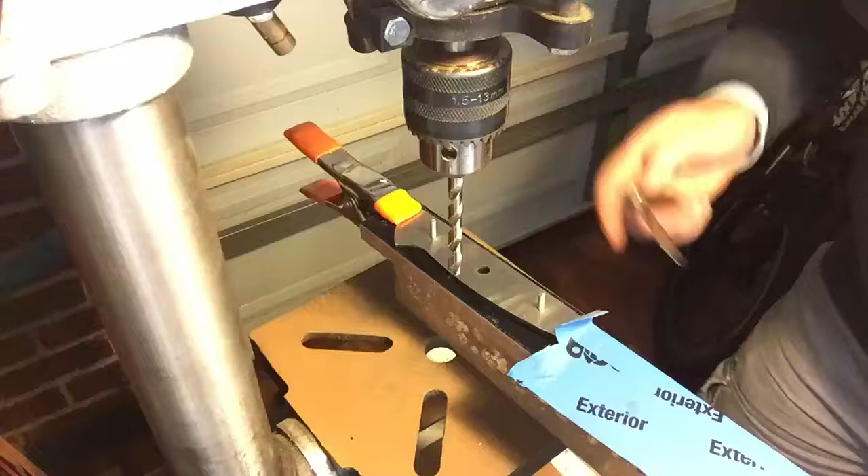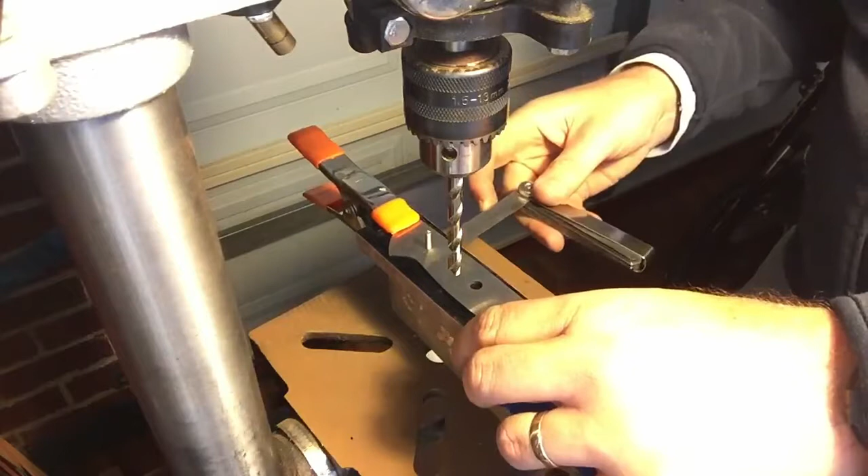So I've just set up my, well, for 1/4 of an inch, the closest oversized drill I can find is 6.5 millimeters, which is a little larger than I'd like. I think 1/4 inch, the hard conversion is 6.35 millimeters, and I'm using a 6.5 millimeter drill. That's a little bit larger than I would like. So if anybody knows of an intermediate drill, please let me know.

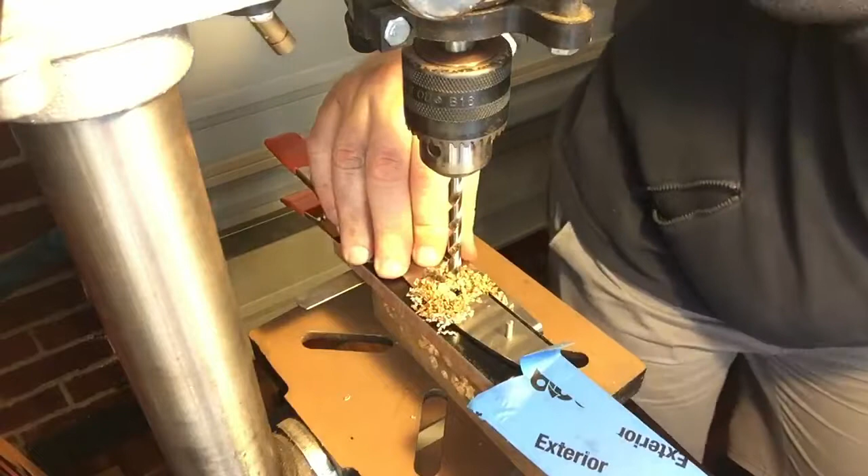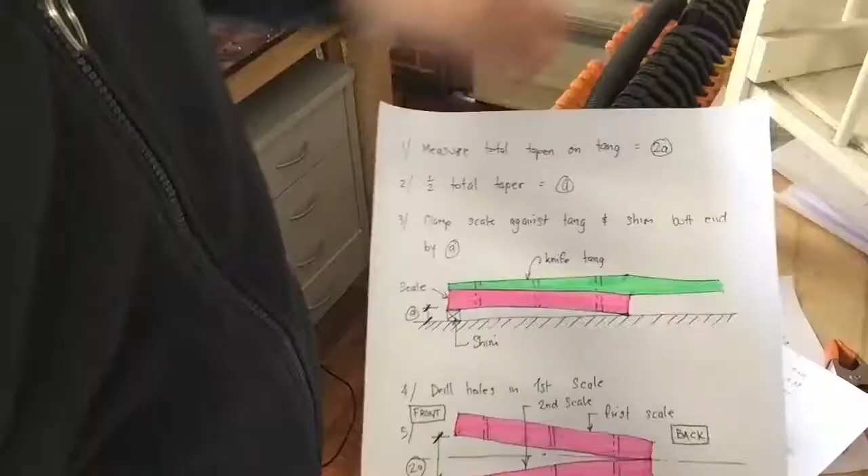Here we go. So I've re-shimmed up the back of the knife, so the knife is parallel or horizontal again. Let's do the 6.5 millimeter drill. And that is the first scale fully drilled. So I've just done a little diagram and some notes here to help us along.

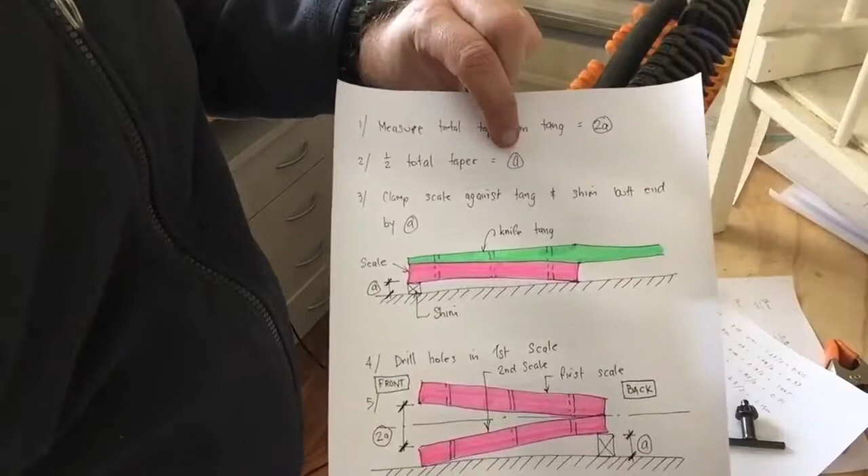So the first thing we did was measure the total taper on the tang, which I'm going to call 2A. And then we divided the total taper by 2 and we received A. In this case that's 1.15 millimeters. So the third thing we did was we clamped the scale against the tang of the knife and we shimmed the butt end by A. So that's the first process we did.

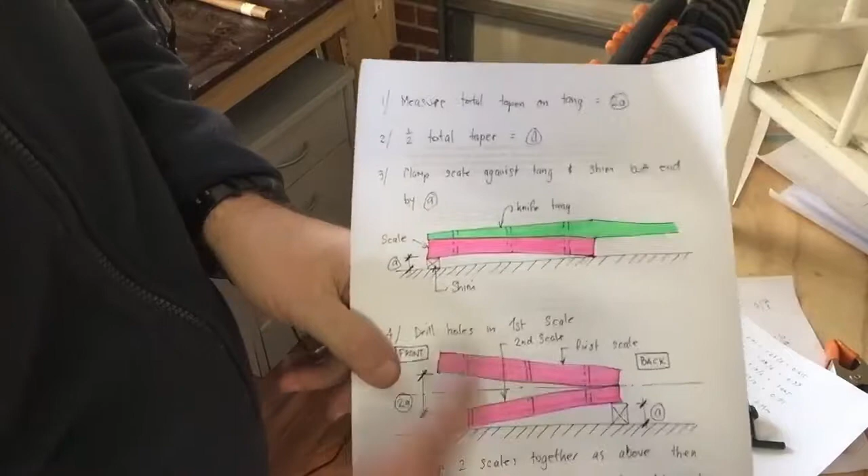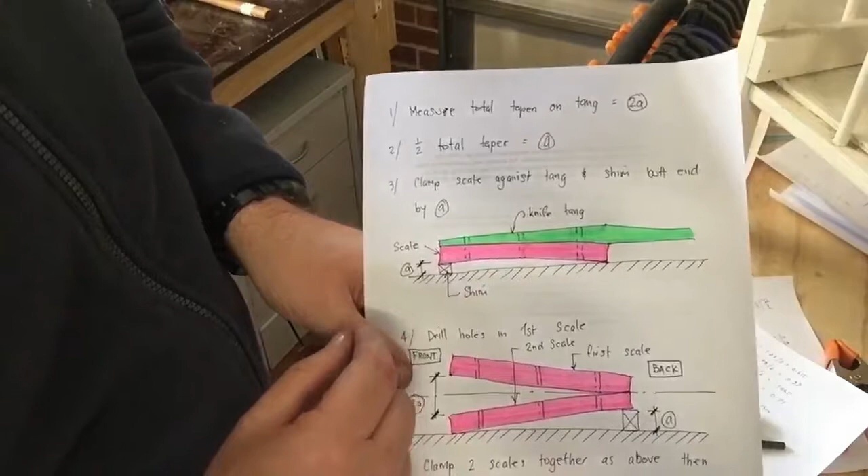The green is the knife with the tapered tang. You can see it tapering down there. The scale is the pink thing. We clamp the scale against the knife, against the tang, and then we put the shim in. The shim was A, which is 1.15 millimeters.

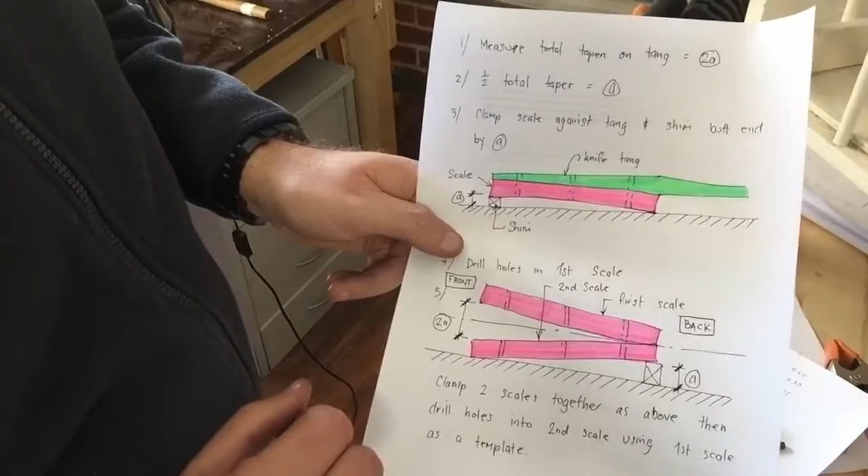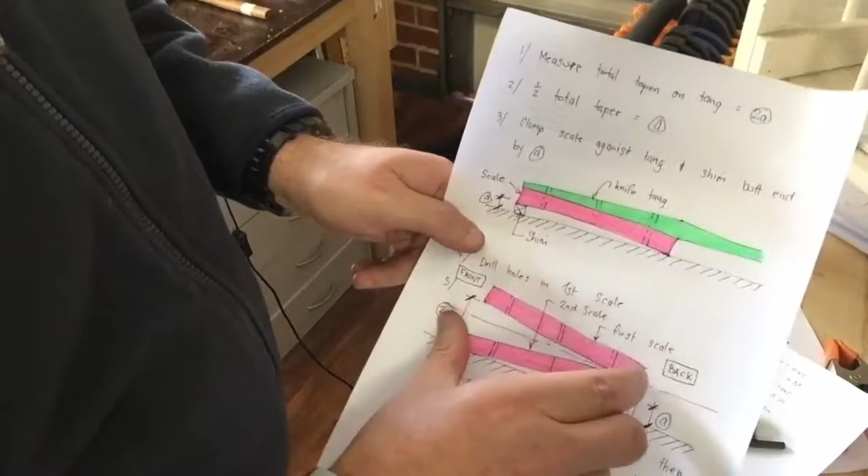So what we're about to do now is we want to drill the second scale, and to do that, now I've drawn this, so this is the back of the knife and this is the front of the knife. Unfortunately here I've shown it around, so here's the back of the knife, the butt, and here's the front of the handle scales near the choil.

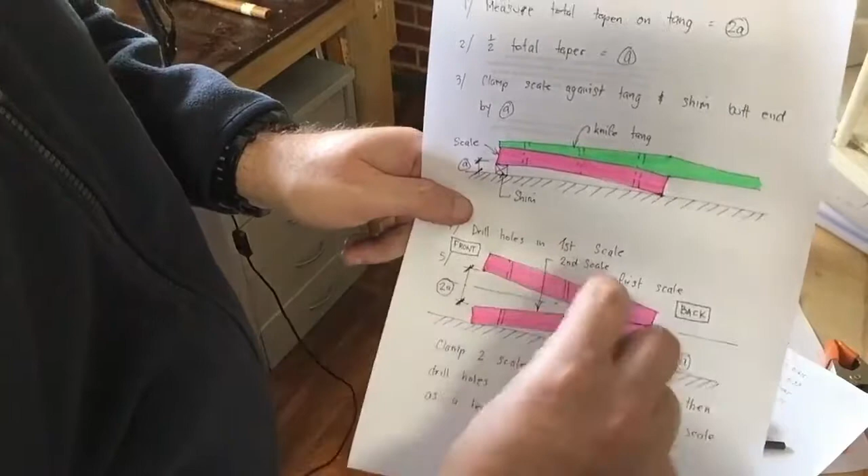So what we're going to do is we're going to take the knife out, we don't need it anymore, and we are going to put a shim in between the front end of the two scales, which is 2A, which is the total taper of the tang. So basically we're trying to replicate the angle of the two scales if they're on the side of the tang. So we put this 2A shim at the front, we leave the back touching, and now it's the same shape as if it was sitting on the knife.

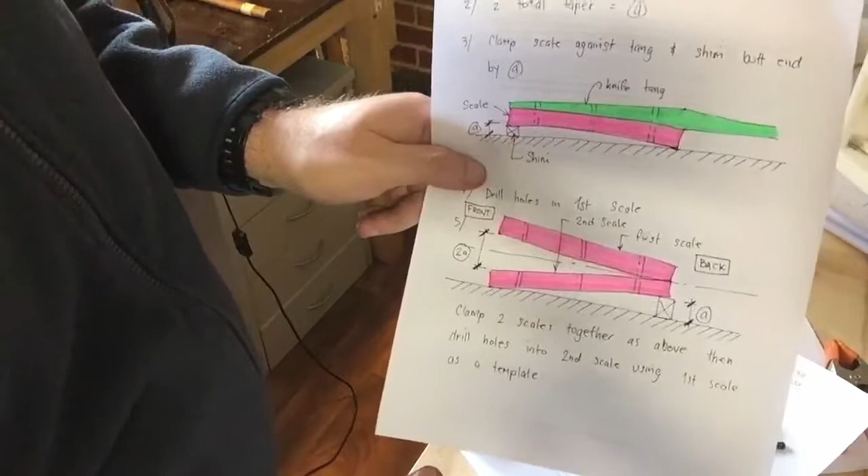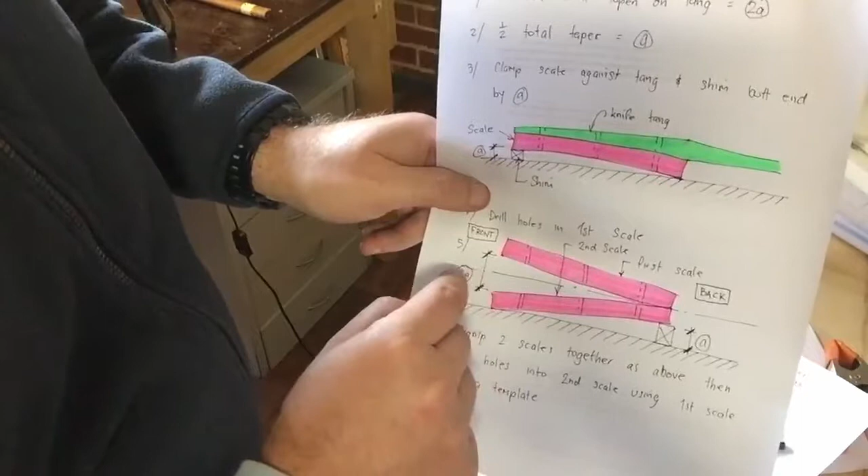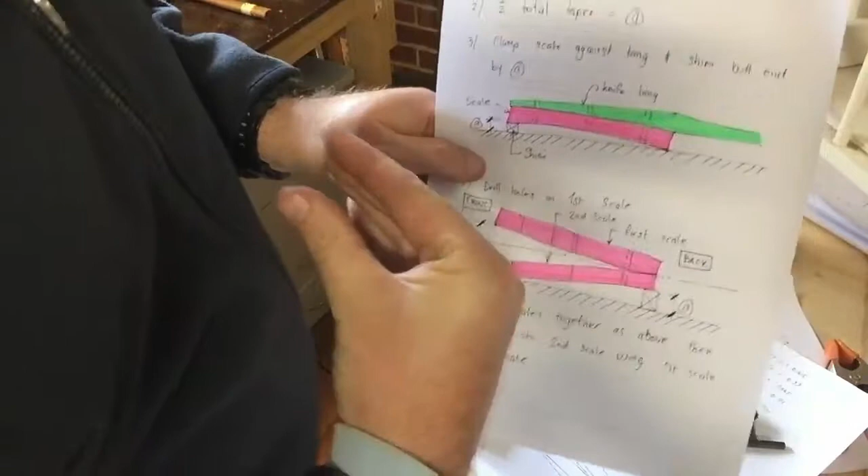And this center line here I've drawn is the line of symmetry for the two handle scales. And to get that horizontal, we've got to shim the back up by A, which is half of the total. So the front gets shimmed in between by 2A, the total taper of the tang, and the back gets shimmed by A, which is half the total taper. And that'll give us two scales that are sitting in the same relationship as they would if they were on the knife, and their center line is horizontal.

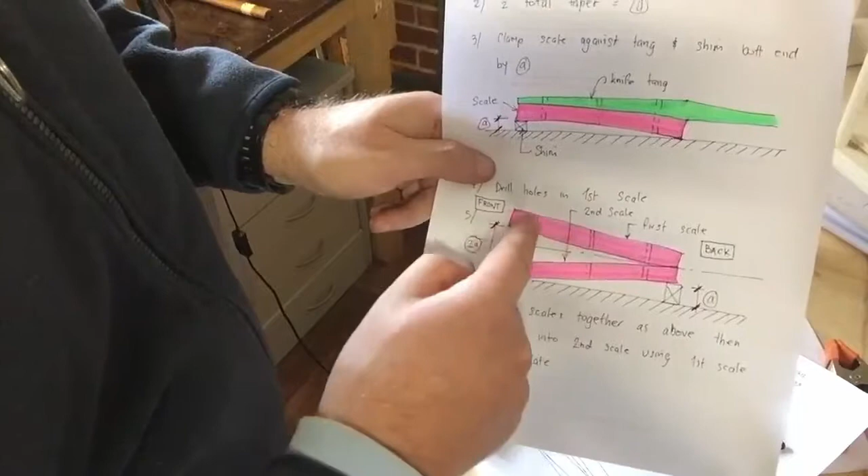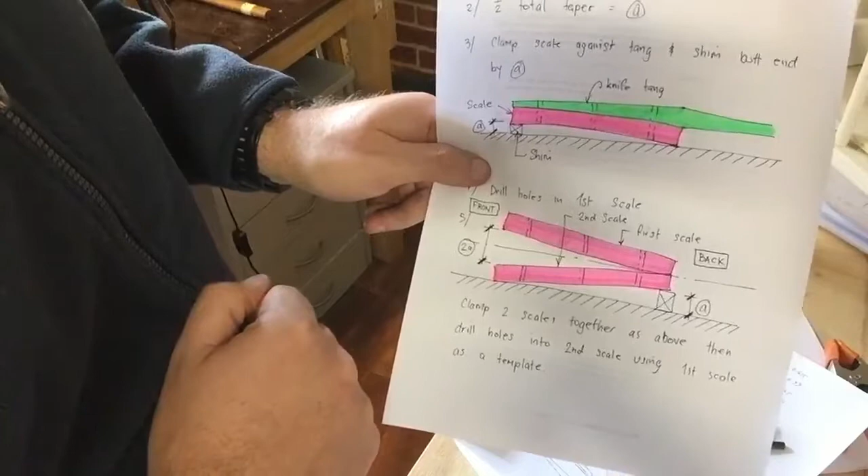So this is the first scale that we've already drilled, sorry, here on the top. And we're going to use those holes that we've already drilled as a template, and we're going to drill through those and then through the bottom scale. And that should give us some holes that when we have finished, we'll be able to put these scales onto the side of the knife and put our pins perfectly through, and everything will line up.

Okay, so here's our scale that we've already drilled, and you can see I've got my top left mark there, and here's my other scale, and there's the top right mark. So those two go together. You can start to see how these marks become handy. Now my spacer for this end, I'm going to use this piece of G10, which I've just surface ground down, so it's 2.15 millimeters exactly.

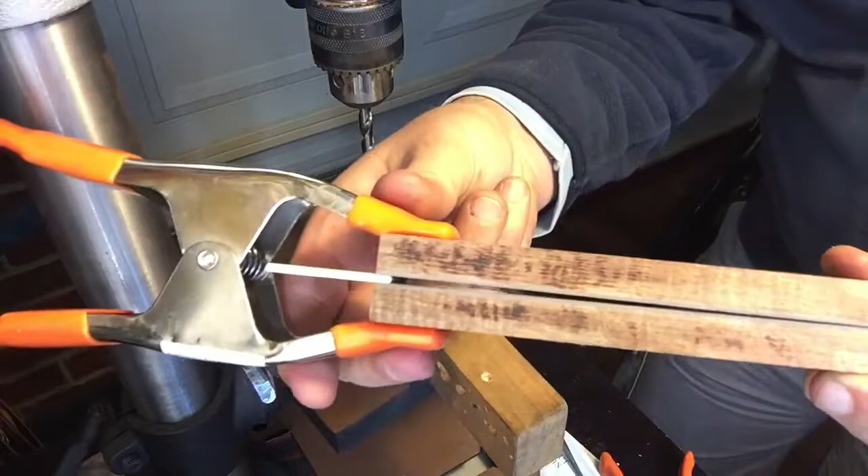And we're going to put that just there, right. So this is the front of the scales, and we'll clamp that. And there you can see how we've introduced a gap, a tapering gap in there between the scales.

And now what we're going to do, we're going to put that on top, this one that we already drilled, because we're going to drill through those holes again. And at the back, so here we go, put that there, and then at the back we've got to shim the back up by 1.15 mil, which we'll do with our feeler gauge.

So there we go. I'm going to move the drill in. Since we've got the 6.5mm bit in, we'll just start with that. Go, we're through.

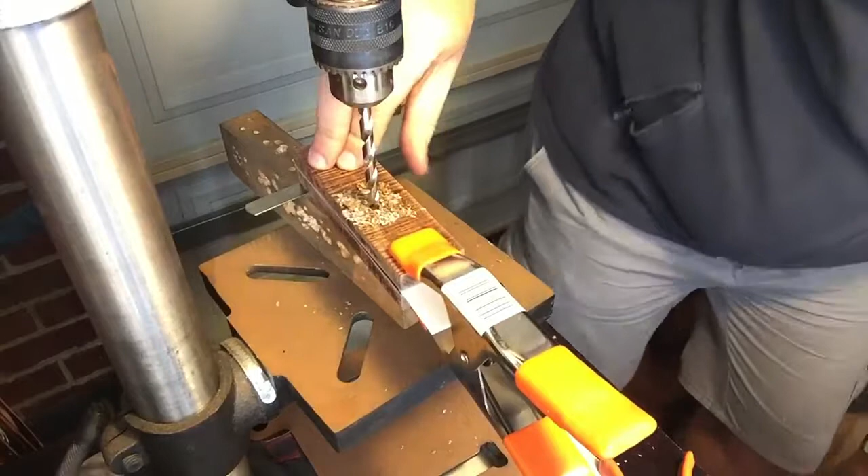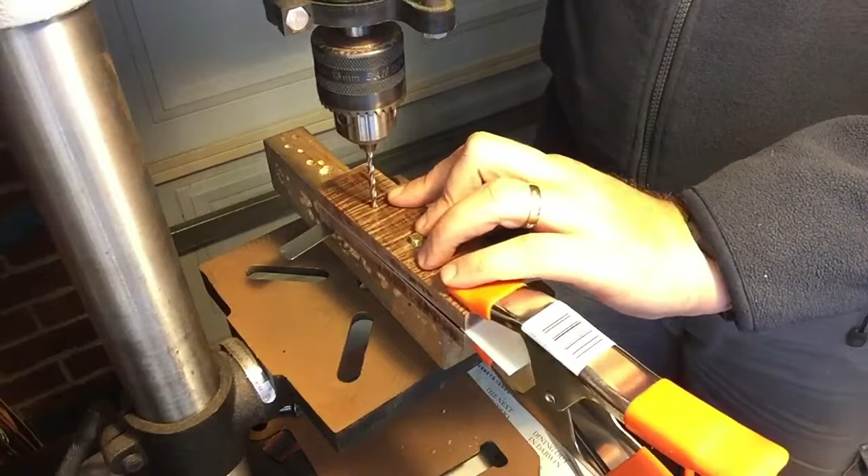Just changed my bit over to the number 30. So here we are, we've got the number 30 bit in. So the first thing I'll do is I'll pop my 1/4 inch pin in, just to make sure everything is registered in together. Put my shim at the back. A bit of a pre-line up. There we go.

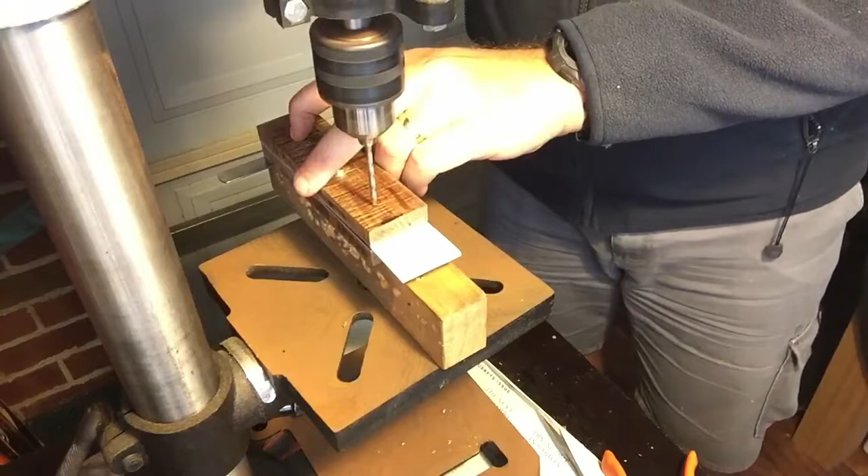Take this clamp off, move this up, whack a pin in the back here. Just hold it a bit lightly at the start, just to let the drill find the center of the hole, or more accurately, the hole find the center of the drill. There we go.

And that third pin will go in. And what we've got is 3 pins all lining up. I'm going to take this off, I'm going to put the tang in between them, and then we'll put the pins back in and we'll just see how it all goes together.

Just before we do anything else, I've got a little countersink bit on here, and we'll put a chamfer on all the insides of these holes. And what that does is when we put it on and epoxy everything up, it gives a little spot for the glue to settle in inside the handle.

And also, when you've got the two scales and the tang all sandwiched together, and you're driving a pin through, it sort of allows the pin to find the center of the hole on the other side. So I find it makes the fit up a little bit easier, gives the glue somewhere to sit. We don't need much, just a little bit. Knocks off any burr from the drilling that's standing proud too, so things will fit flusher together.

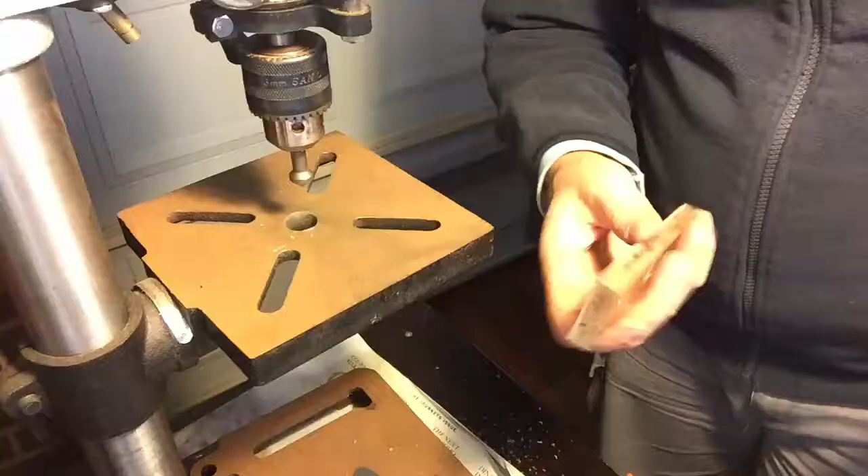Okay, so now let's fit this all up. So there's my little top left reference mark, which goes at the top left of the knife. I'll put a couple of pins in here, that'll be the easiest way to do it. One in there, 2 little 1/8-inch pins, and we'll put those through the 1/8-inch tang holes. There they go.

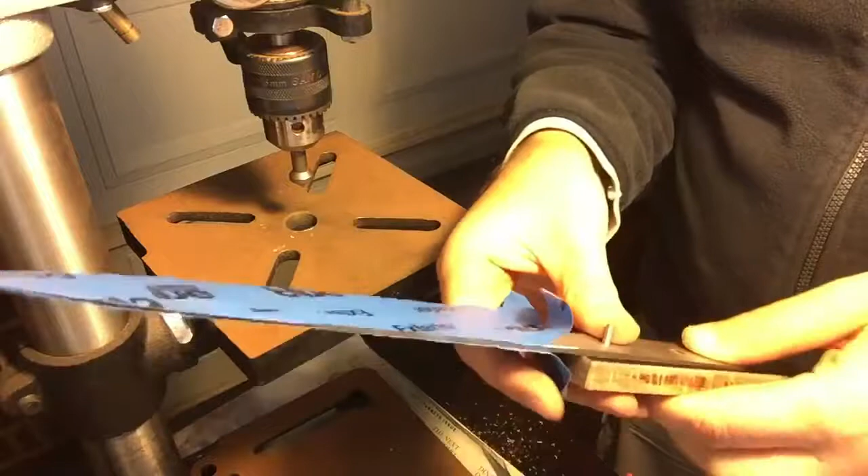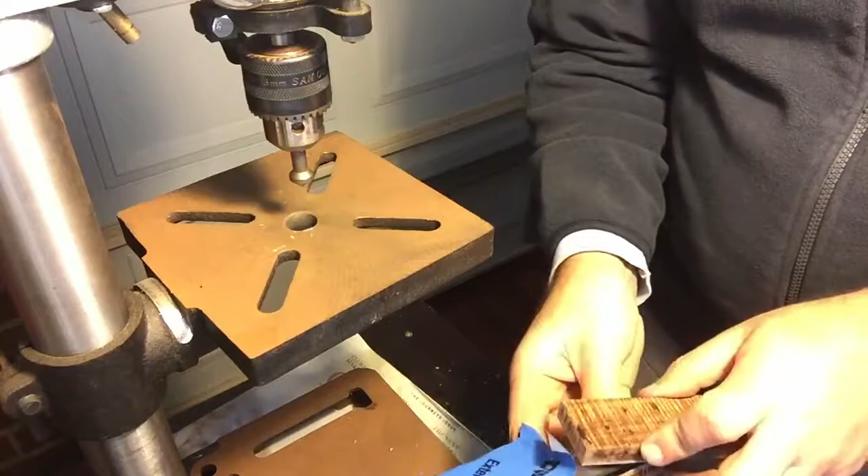Oops, there's the top right mark, put that there, together it goes, and this 1/4" mosaic pin should fit nice and snugly. Just a bit of a tight fit, which is what we want. And there it all is. So that's how it all goes together.

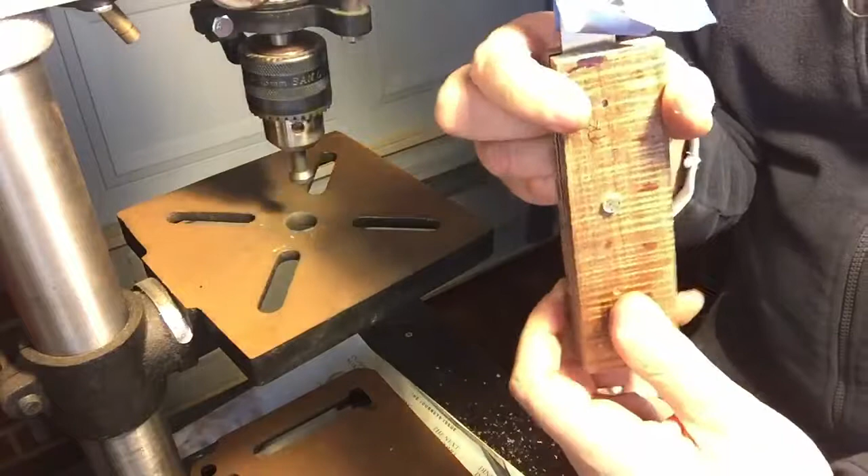So now you'll see the taper of the tang all shown up, the 2 scales on either side, and the pins all parallel, all perpendicular to the centre line of the knife, all fitting up nice and snug, just the way we want them to.

Now what I usually do is I hold this up to the sky outside, and I look through, and if there's any gaps, which is not in this case because I've already done this, you can see the light coming through in between the scale and the tang. But yes, in this case we've got a nice tight fit up, so everything's looking good.